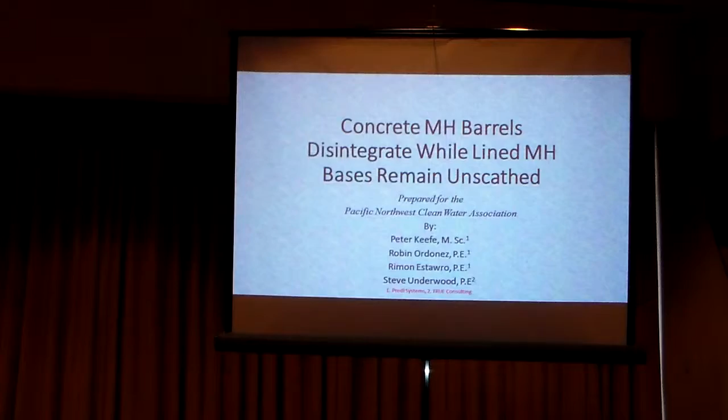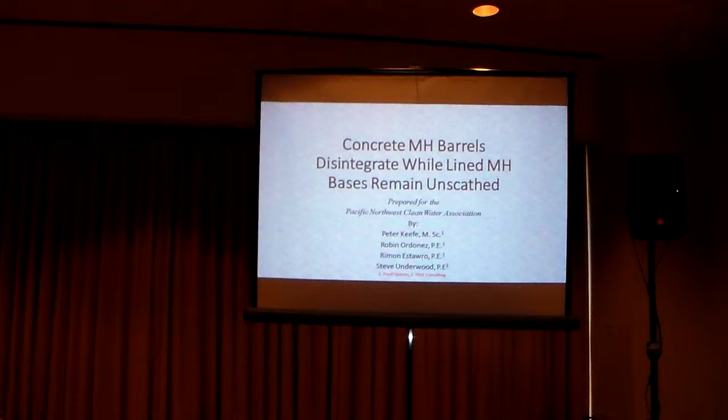Thank you. Good afternoon. This presentation today is about a manhole or a sewer system in Oliver, British Columbia. So it's titled Concrete Manhole Barrels Disintegrate While Lined Manhole Bases Remain Unscathed. It was prepared for this conference by Peter Keefe, who's the author, with contribution from myself and Rimon Estawro, we're from Predl Systems, and Steve Underwood from True Consulting up in British Columbia.

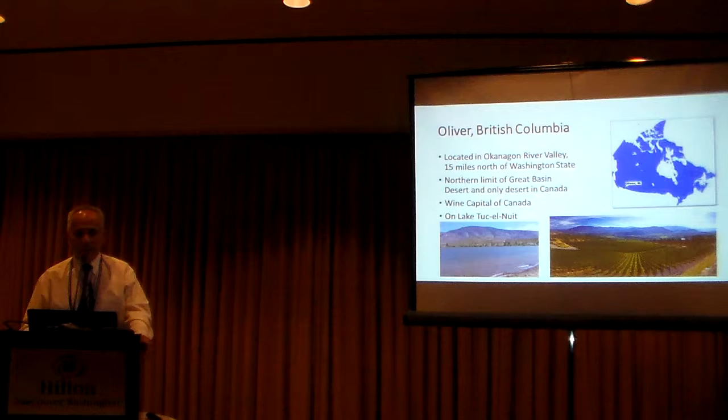Oliver, British Columbia is a town of about 5,000 people, and it's located in the Okanagan River Valley, which is about 15 miles north of the Washington state border. It's the northern limit of the Great Basin Desert and the only desert in Canada. And it's also the wine capital of Canada, and it's located on Lake Tuc-el-Nuit.

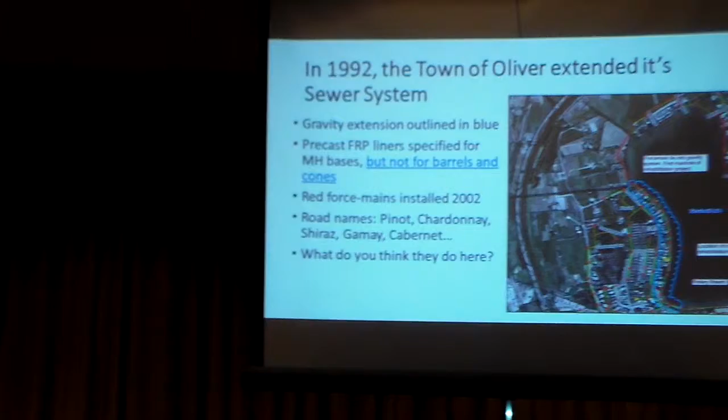In 1992, the town of Oliver extended its sewer system, and they extended a gravity system to take in some residential properties along Lake Tuc-el-Nuit. It's about 2,700 feet long, 17 manholes. And an interesting thing about this gravity line, these properties were provided with septic systems prior to that, and they were connected into the gravity system. The city acquired easements across all those lakefront properties and installed the sewer gravity line.

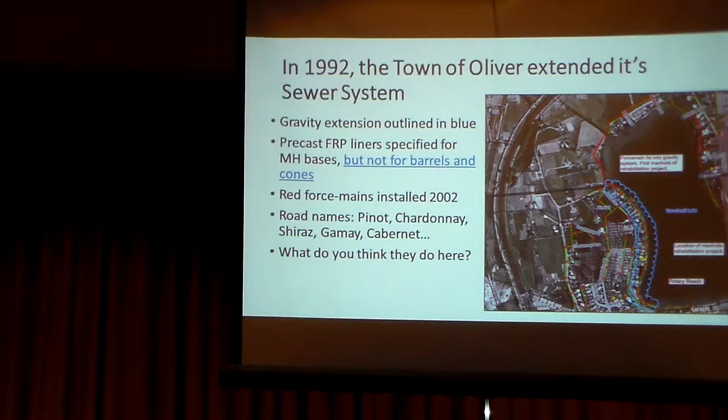Now, the interesting thing about this sewer system is that the town wanted to connect another residential area with a pump station. It's the Stewart Road pump station on the very north end of the project. And so that force main took sewers from about 200 homes to the Stewart pump station through this gravity system and connected the 30 homes and to another pump station down to the south, which is the Rotary Beach pump station.

So the red force mains were installed in 2002, and of course you can tell the road names of the streets in this area are Pinot, Chardonnay, Shiraz, Gamay, and Cabernet. And so what do you think they do here in the town of Oliver? Immediately they had minor odor complaints. Odors were thought to result from low flows.

When you consider you have a minimum grade 8-inch sewer line with 30 residents along the beach and about 200 residents, you could never attain self-cleansing velocity, so therefore they had odor issues. Oliver constructed sewer vents from the manholes up into the trees to dissipate the odors. So the vents basically reduce the detectable odors from the residents along the beach and quote unquote solve problems, not necessarily, as all of us in the sewer business know that you still have some issues. And so for the next decade, it was uneventful.

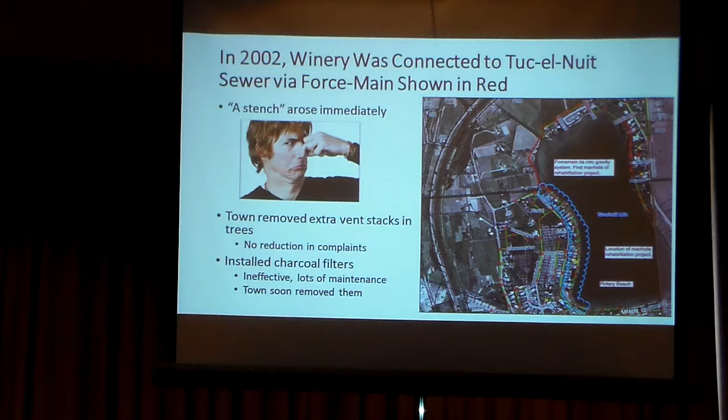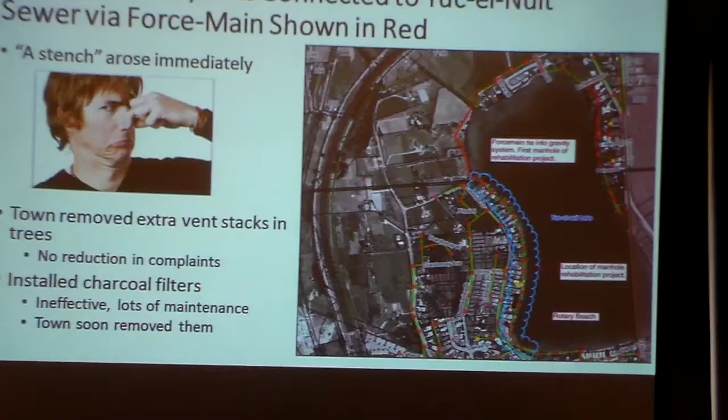In 2002, a winery was connected to the Tuc-el-Nuit sewer via a force main that's shown in red. This sewer line is about 2.1 miles long, a force main, and it also connected into the end where the other force main went into the Rotary Beach pump station or into the Stewart Road pump station.

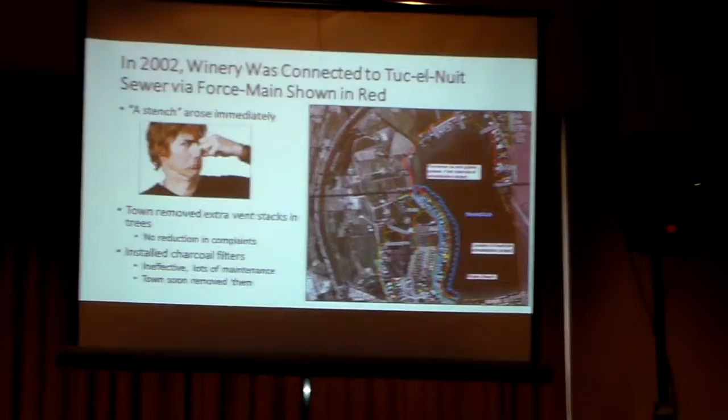So a stench arose immediately. It was highly odorous. So the town decided to remove the extra vents from the trees, and there was still no reduction in odor complaints. So they installed charcoal filters on the manholes, which proved to be ineffective and also required a lot of maintenance. So the town removed them.

So Oliver's fight against odors continued. They installed P-traps on the sewer laterals, similar to the P-traps under your sinks, and they were somewhat effective, but odor complaints continued. Well, they obviously stopped the odors going from the gravity sewer system up through the individual residential vents, and that's what was occurring.

So the town decided to encapsulate the manhole covers in plastic bags and buried them under 4 inches of soil. So basically, the odors were removed. Well, let's put it this way. They were removed from the senses of the residents, but they were trapped in that gravity sewer line. So something else was bottled up, obviously the hydrogen sulfide.

So in 2007, part of the main interceptor near Oliver's wastewater treatment plant collapsed. It completely collapsed. And so Oliver quickly replaced the interceptor with a 36-inch PVC pipe. Concrete manholes were replaced with IPEX manhole structures. And by the way, this 36-inch line was 25 feet deep.

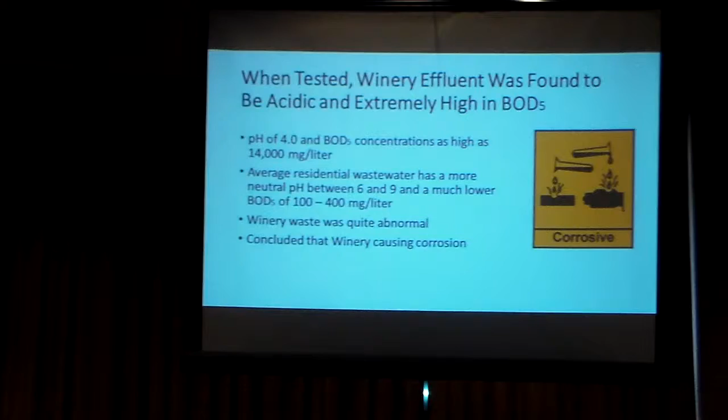So when the winery effluent was tested, it was found to be highly acidic and extremely high in BOD, with pH of 4 and BOD concentrations as high as 14,000 milligrams per liter without pretreatment. And of course, average residential wastewater is more neutral, pH between 6 and 9, and a lower BOD of between 100 and 400 milligrams per liter.

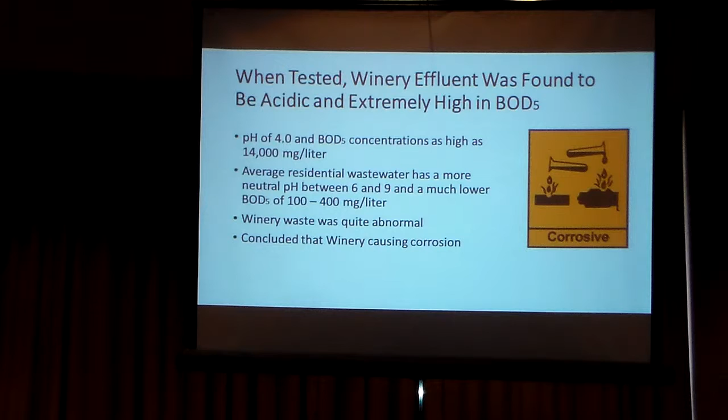Also, some of the things that went unreported were some spills into the collection system, which ended up in the pump station that was directed to the gravity sewer. So they had a number of issues with unreported spills as well. And so obviously the winery waste was quite abnormal since it was not pre-treated. And so the town concluded that the winery was causing the corrosion.

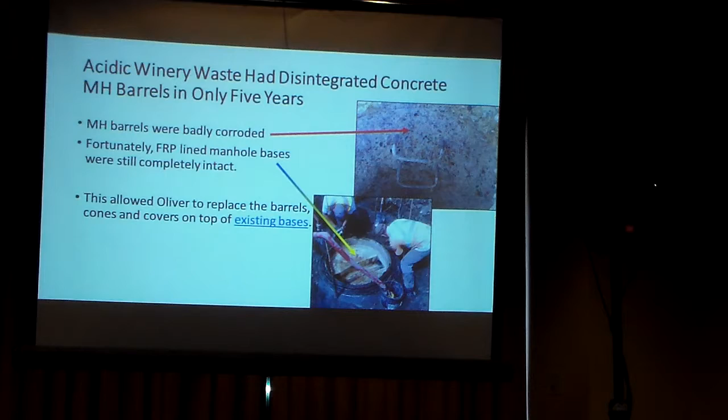So the acidic winery waste had disintegrated concrete barrels in only 5 years, to the point where the aggregate was exposed and also some of the rebar, and in some cases, soil was actually coming through on some of the corroded portions of the manholes.

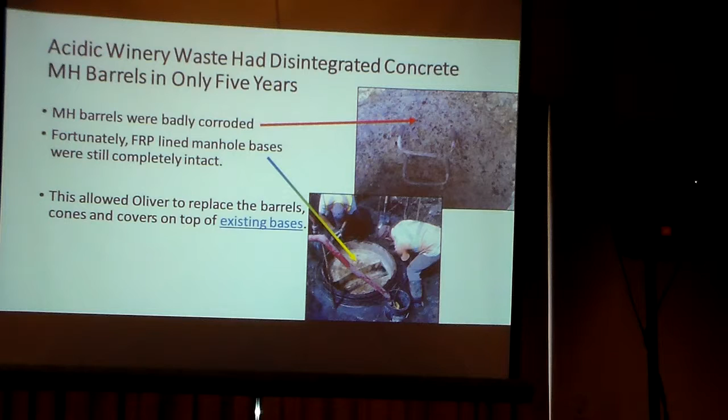Fortunately, the fiberglass reinforced polymer lined manhole bases were completely intact and still flowing. And so this allowed the town of Oliver to replace the cones and covers on top of the existing bases while it was still operational. The new FRP lined barrels were installed on the existing intact bases, and the shallow 8-inch Tuc-el-Nuit sewer remained in service all the time during construction.

And they reused the manhole bases and avoided bypass pumping, saving about $13,000 in bypass pumping costs. But actually, replacing those 17 manhole bases would have cost somewhere in the neighborhood of $250,000 more on this construction project. So in 2012, the winery, and I'm not sure they voluntarily added pretreatment, but they added pretreatment, and the average BOD dropped from 4,000 milligrams per liter to less than 200 milligrams per liter.

So the Oliver story ended well. The corroded manholes were replaced with the corrosion-proof FRP lined manholes. The reused bases reduced construction costs, at least as far as the bypass pumping was concerned. And pretreatment greatly reduced the acidic concentrations in the collection system, and also lowered the BOD. So Oliver has started to live happily ever after too. Maybe so, but the author of the report needed to know more.

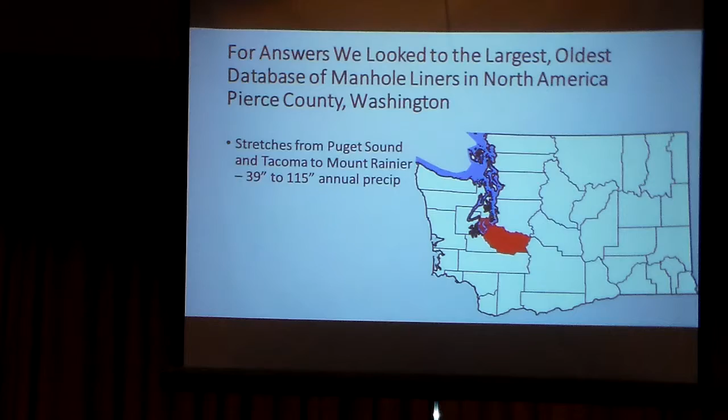For answers, we looked to the largest and oldest database of manhole liners in North America, and that's in Pierce County, Washington, the Pierce County Sewer Utility. It stretches from Puget Sound on the west and the city of Tacoma on the north to Mount Rainier on the east, and has an average annual precipitation of 39 inches up to 115 inches.

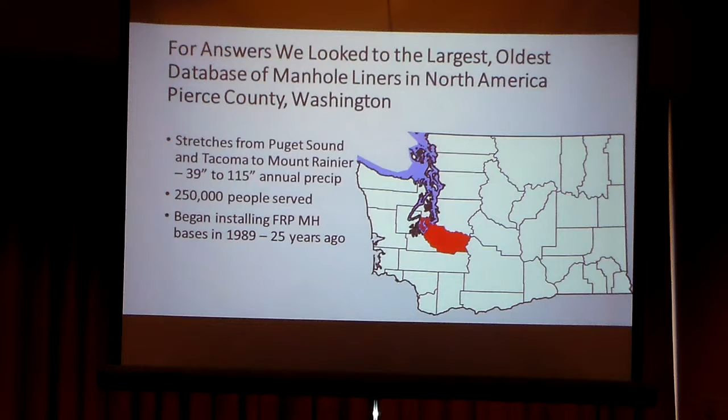Pierce County Sewer Systems is about 78 square miles in service area. They serve 250,000 people. They began installing the FRP manhole bases in 1989, which is about 25 years. And to date, 11,000 have been installed on their sewer system. The sewer system has about 18,000 manholes, and prior to that, the sewer system came on board in 1984. That's when the treatment plant became operational.

So for the first 5 years, they installed about 6,000 to 7,000 manholes. Their collection system is about 870 miles of sewer mains, anywhere from 8-inch to 84-inch in diameter. About 700 miles are public sewers, and 170 miles are private sewers. Pierce County, in their infinite wisdom, decided they didn't want to take over the maintenance of private sewers, and so the ones that were installed in private roads and private property were owned and operated by the property owners. But the standards for the sewer collection system are the same, whether it's public or private sewers.

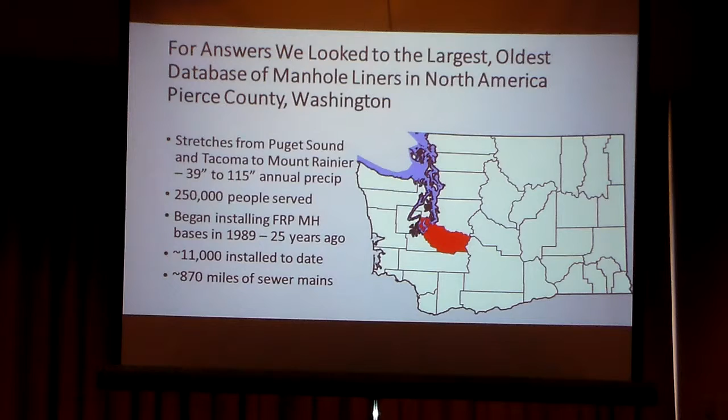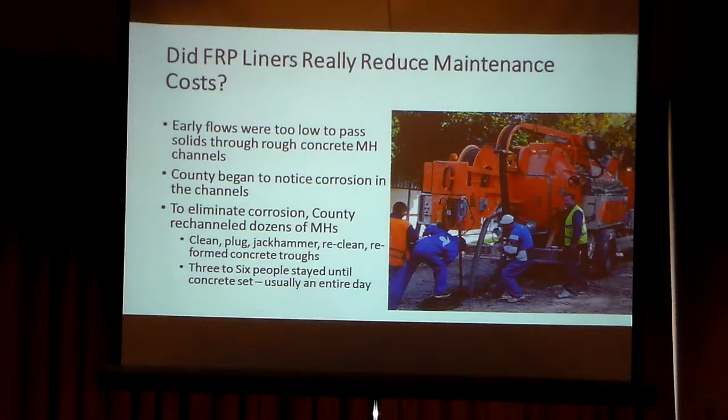So did the liners really reduce maintenance costs? Well, the early flows in the collection system were about 5 MGD. The plant was designed for 12 MGD. So a lot of the sewers were designed for the overall basin, so the slopes of the gravity lines were based on full buildup. So the early flows were too low to pass the solids through the concrete channels. And the county began to notice that there were some corrosion issues in the channels.

And to eliminate the corrosion, the county rechanneled dozens of manholes where they cleaned and plugged and jackhammered and recleaned and reformed the concrete troughs. And typically 3 to 6 people were needed during this operation, usually about an entire day for a manhole. Rechanneling costs 4 workers and 2 trucks, 4 workers at $20 an hour, 8 hours a day, and overhead factor of 3.0. Vactor trucks at $3,000 a day, and a flush truck for $1,600 a day, about $6,500 a day. It didn't always necessarily stop the clogging in the troughs.

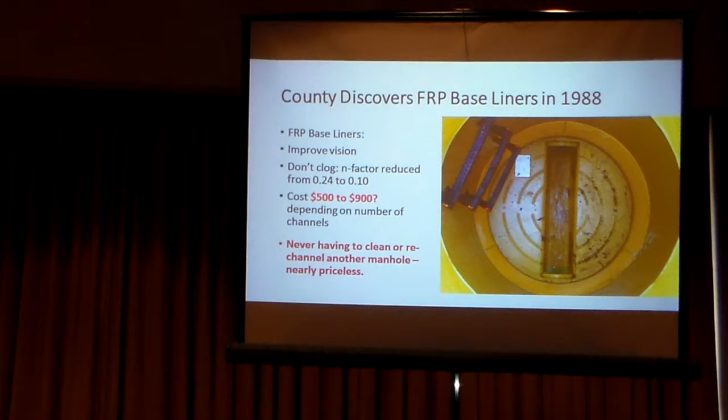So the county discovered the FRP base liners in 1988. A salesman stopped and talked to the engineering manager, and a couple of weeks later, in a conference meeting, the engineering manager and the maintenance manager were discussing where his staff was going with maintenance folks, and he talked about that they had to go back out and rechannel a bunch of manholes. And so the engineering manager asked the maintenance manager to take a look at these FRP liners. Consequently, in about 1989, the first project was put out where these liners were sole sourced, and to this day they're still sole sourced on the Pierce County sewer system.

So basically, improving the vision. It's nice bright yellow. It's easy to see when you pop the lid. They don't clog. The Manning's roughness coefficient goes from 0.24 to 0.10 because it's fiberglass reinforced polymer. And a typical cost on a 48-inch manhole for one of these liners is anywhere from $500 to $900, depending on the number of channels that you specify. And so never having to clean or rechannel another manhole is nearly priceless.

So how reliable are the liners? There have been 6 liner breaks in 25 years in 11,000 manholes. 4 were caused by improper repairs where a developer cut into an existing manhole and their contractor repaired the existing liners. And 2 of the defects we're not sure how they were caused. Sometimes when workers are working on the system, they'll drop tools and possibly break the liner, and they have to be repaired. So all defects can be repaired in place, and 99.95% were intact through construction.

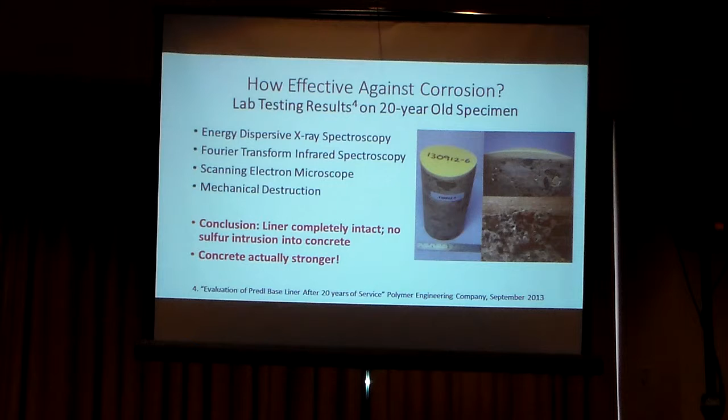So how effective are these liners against corrosion? Lab testing results on a 20-year-old specimen, which was removed in 2013 and tested by Polymer Engineering Company of BC. They used energy dispersive X-ray spectroscopy, Fourier transform infrared spectroscopy, scanning electron microscope, and mechanical destruction. And the conclusion of this testing company was that the liner was completely intact, there was no sulfur intrusion into the concrete, and that the concrete was actually stronger.

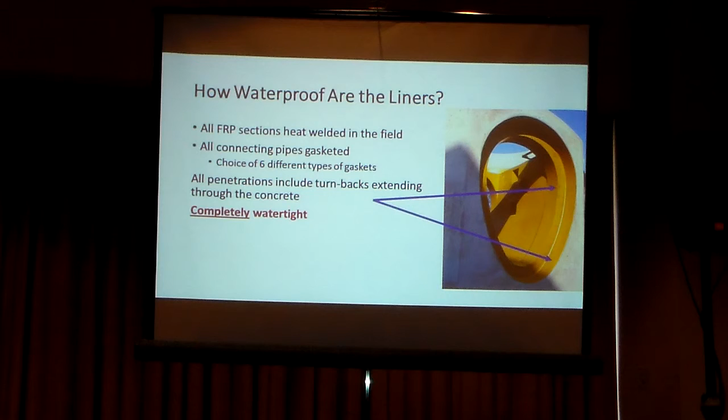So how waterproof are the liners? All FRP sections are heat welded in the field. All connecting pipes are gasketed with a choice of 6 different types of gasket, whichever are specified by the owner.